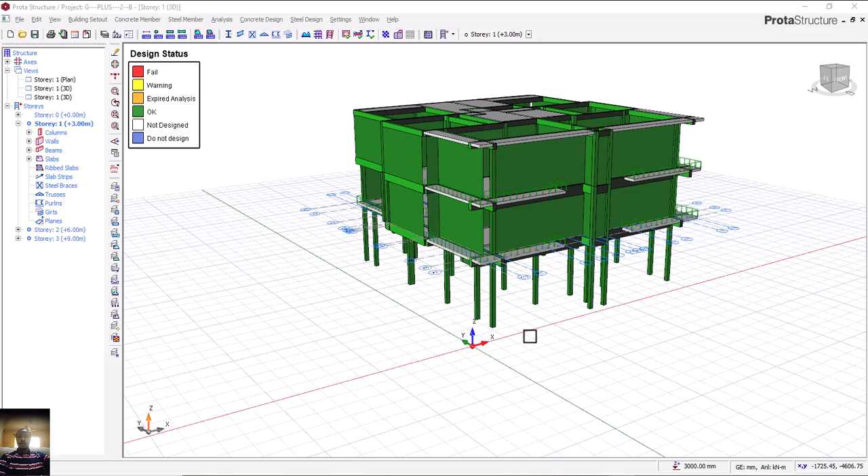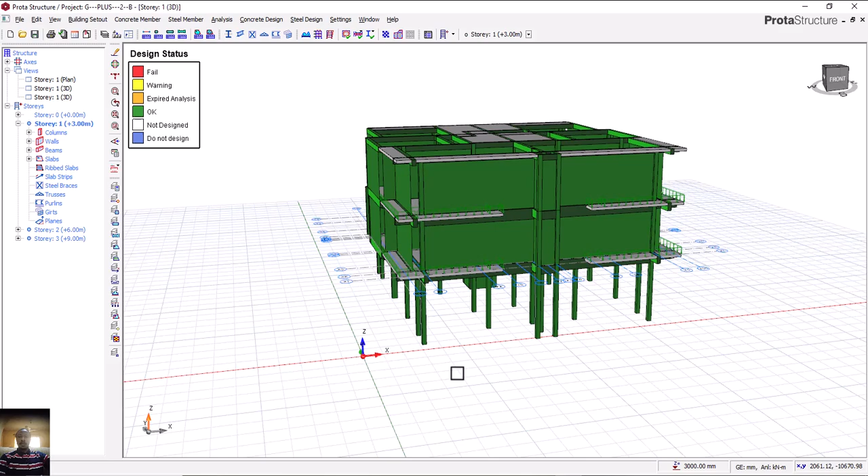Today there's something very important I'd like to show. If you look at this structure, the report says we have a bearing capacity of 150, with an average range of 125 to 175, so 150 is what we'll use. Also, the depth at which they got that 150 bearing capacity was 3,500 millimeters, that's 3.5 meters.

Let's look at our structure. Let me come to storey 0 on 3D. This is story 1. Let me come to story 0 by double clicking on it. Can you see this? From here to this place is our story 1. Now our foundation is from here down, which is not up to 3.5 meters. It's just about 1.1 meters.

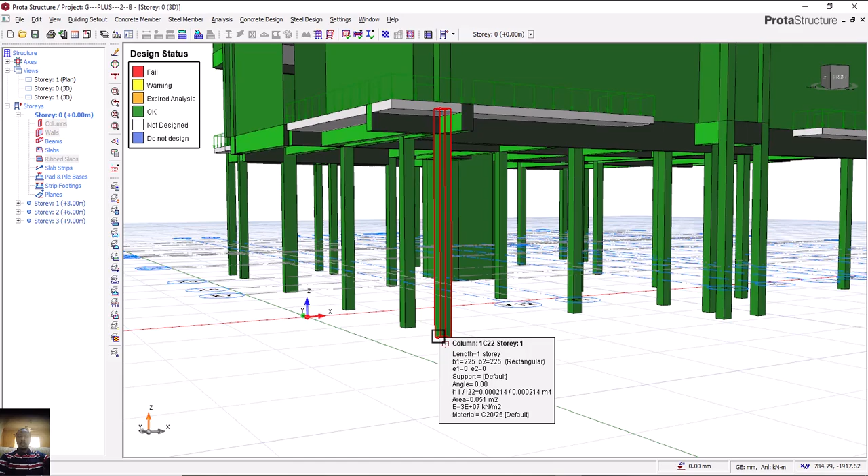Based on the soil report, we're meant to have 3.5 meters depth. So how do we effect that? Let's do that. For me to effect that depth on the column, we have to use a pad. So the way they're going to do this foundation is not the normal way of digging a trench.

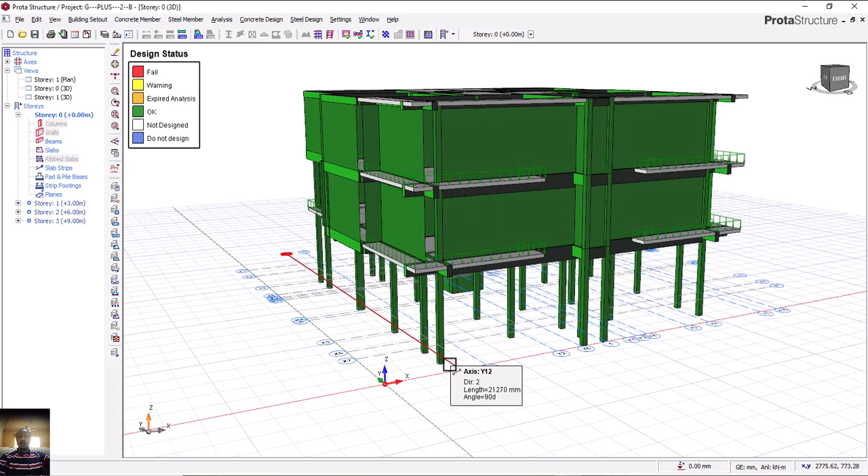They are going to pick points, and at those points they'll use a machine to dig to that depth, then cast, all through. Maybe when it's at some meters above, then we can think of having a trench.

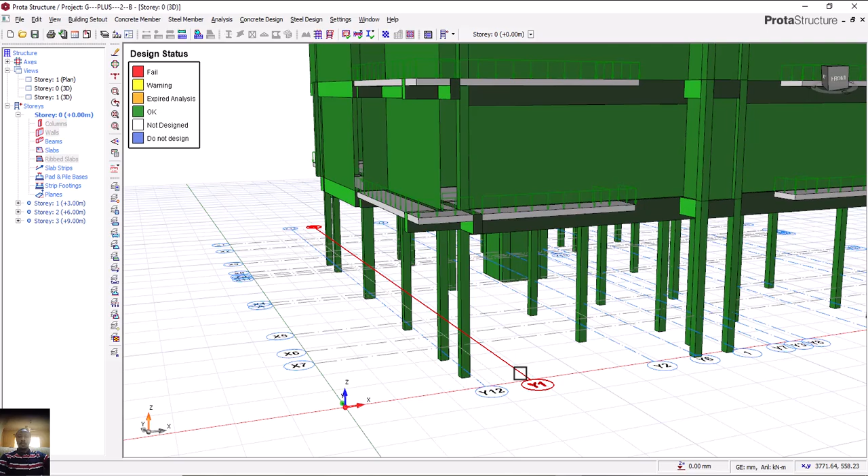I won't explain that now. Definitely at that depth we cannot just leave a whole column from here, already 3.5 down, and also come up 3 meters. Guys, that's 6 point something. So without breaking it, to avoid buckling, what are we going to do?

So in order to avoid that, let's first effect this depth. I'll come here, come to edit story. You can see the foundation depth here. I'll click on it and set it to 3,500, since it's in millimeters. I'll now click OK.

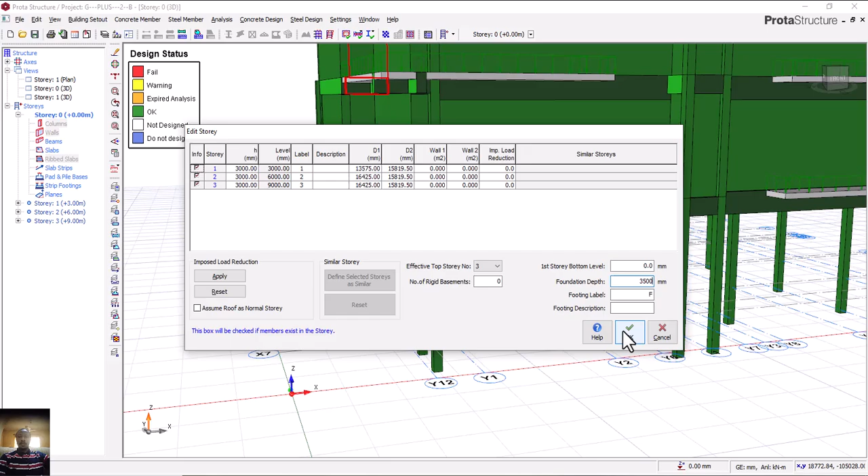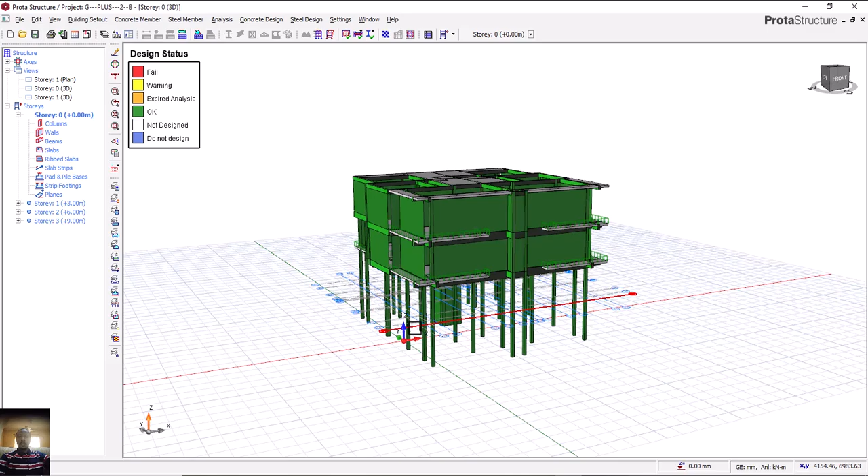Can you see now? You can see the effect, the difference. So if you like, for you to be sure it will pass the design, we can reanalyze. Looking at this, it's actually passed, it's very okay, it will carry the structure at this depth.

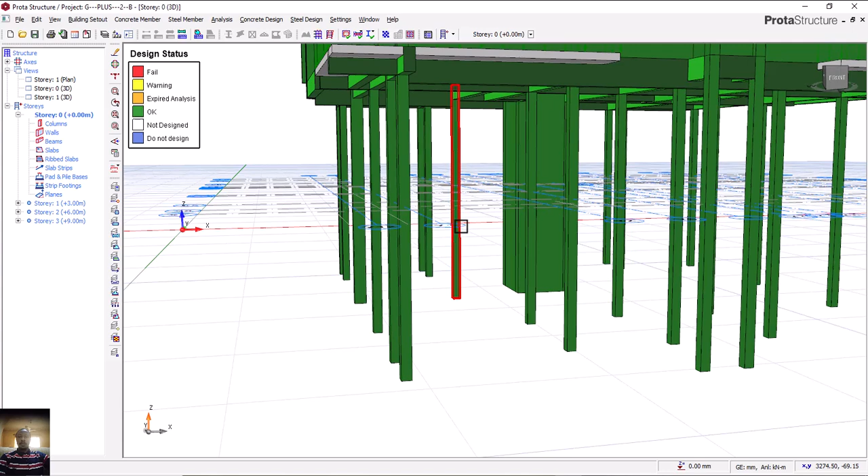But from experience, it's very important, we cannot just have it all straight like this. Since we cannot have it all straight, we are going to break it here and provide a beam, a foundation beam all through.

So let's go to story 1 plan. I'll come to plan view, then to story 0. I'm going to provide my beam. Bring up my beam, where's my beam, my story beam, sorry no, come to member, yes, concrete beam. Now from this point the property will come up.

So the beam I want to use, that's my plinth now. Let's call it plinth beam, 350, okay to carry it, since it's already in contact with the soil, which in one way or another is going to act as a support also. So I'm going to use 350 by 225 by 350.

Now what's very important, I'll come here. Can you see? This is my 3D. We have it in millimeters. I'll come here and make it go up to 3,500. Let's see it first, what we're going to get. Click on it, okay, then click here, escape, let's see the 3D.

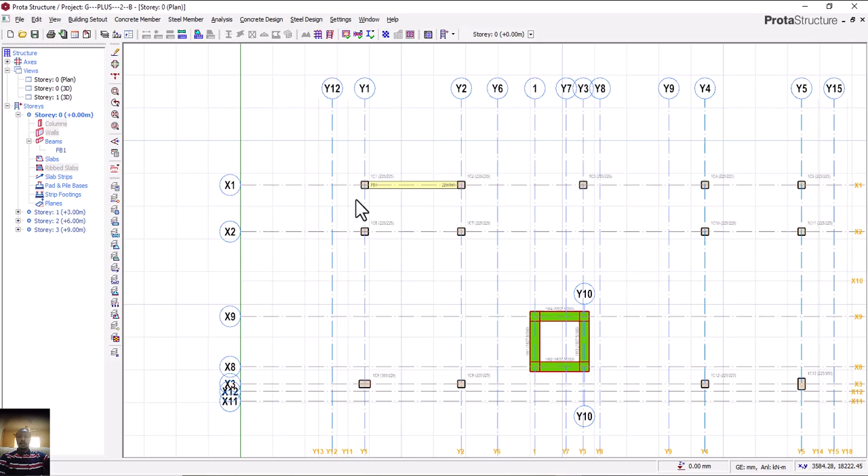Can you see what we have now? So if you look at it now, it's above the axis. Is that okay? At the upper side. So I want it to be on this axis. That's how I want it on this particular axis.

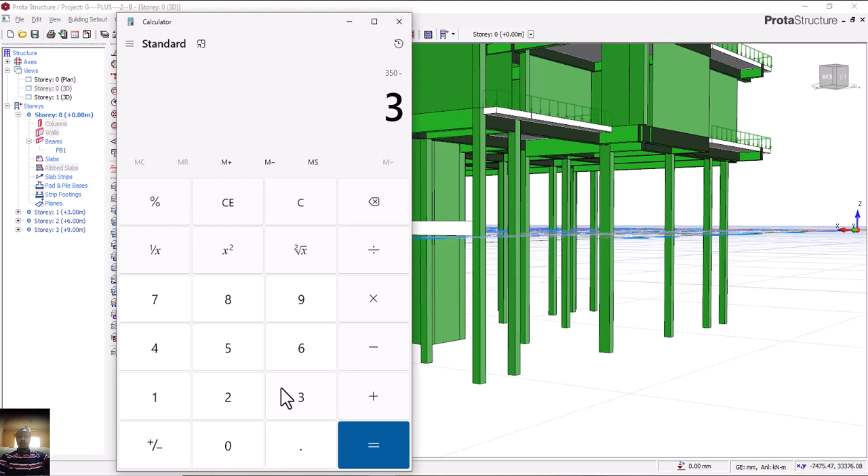Is that okay? So I'll now come here, property again, come to this 3D side and make it 3150. Is that okay? 3150, and then click on update. So can you see it now?

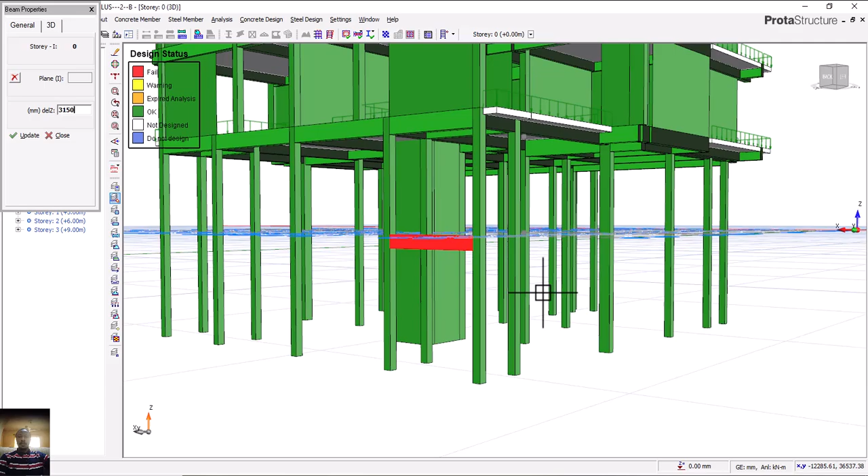Now escape, let me escape. So can you see what we have now? Can you see it now? So exactly where we want it to be. Can you see how we have done the calculation and how we have achieved this? So this one becomes my plinth beam now, which I'm going to be providing for all of them all through.

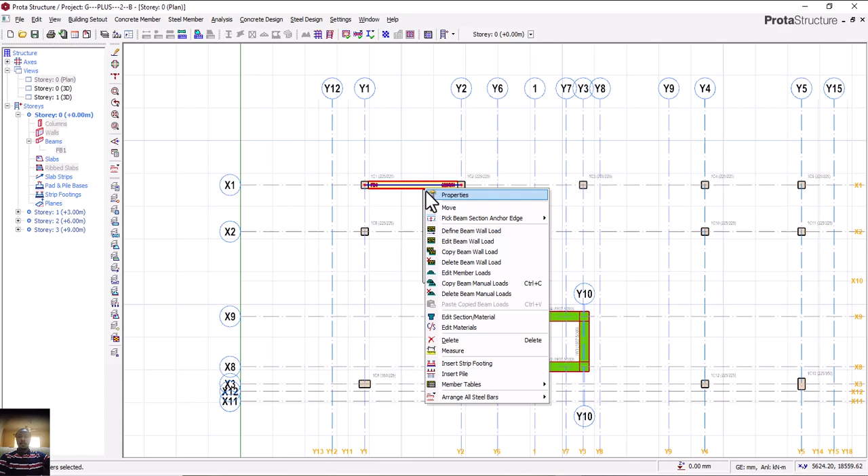Is that okay? I will now come here, come to this place. I will now take the properties of this, click on this, right click and click on the property. So I begin to insert it.

Is that okay? Based on what I have, let me just run it through. Let me also run this one. I think they're on the same straight line. Am I correct? Yes, they're on the same straight line.

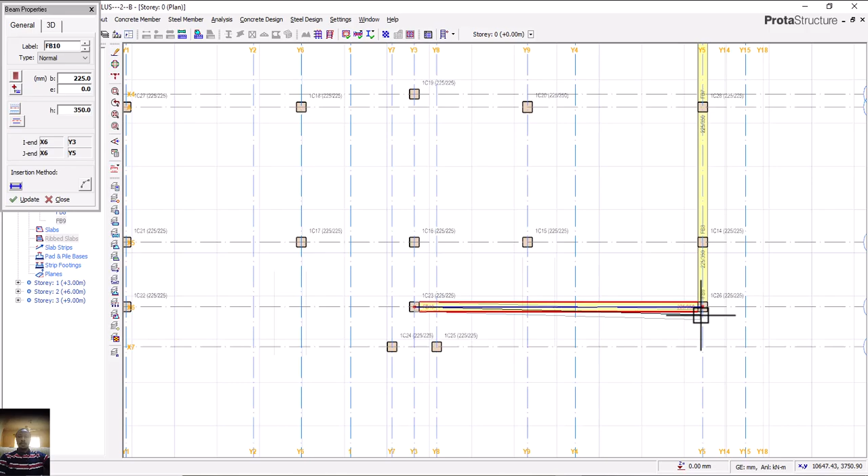Is that okay? Also, I think this one came like this, and also like this. This one also like this. Plinth beam, so it can be different from that of the superstructure. Is that okay? So it doesn't really mean.

So I can come here now, click on this one, and then come and join it with this. They are on the same straight line. Is that okay? And then also come here again.

This one came to this one here. Is that okay? And then this one also came to this, from here to this one here. Is that okay? Okay, all right, it's correct.

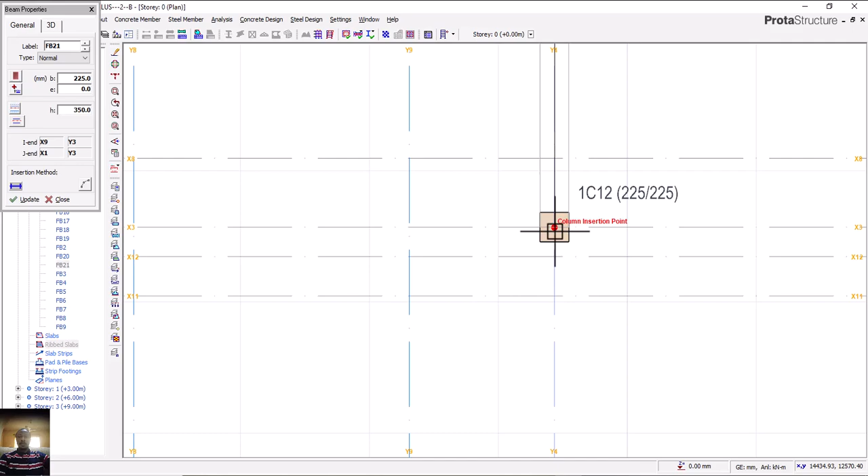And then also here again, is it all true? Yes, to this point here, to this point here. And also I can come here and say this one from this point here, from this point here to this point here. Is that okay?

And also I can come here now, this one comes straight from this point here to this one, all straight to this point here. Okay, then I can also come here now again. I can have this one here.

Okay, I think this one is not part of it. This one is not part of it, because this one is at the top. Is that okay? It's at the top. We have this beam. Is that okay? This is how it is. Is that okay? Around here there's nothing here. Is that okay? We can leave it like this.

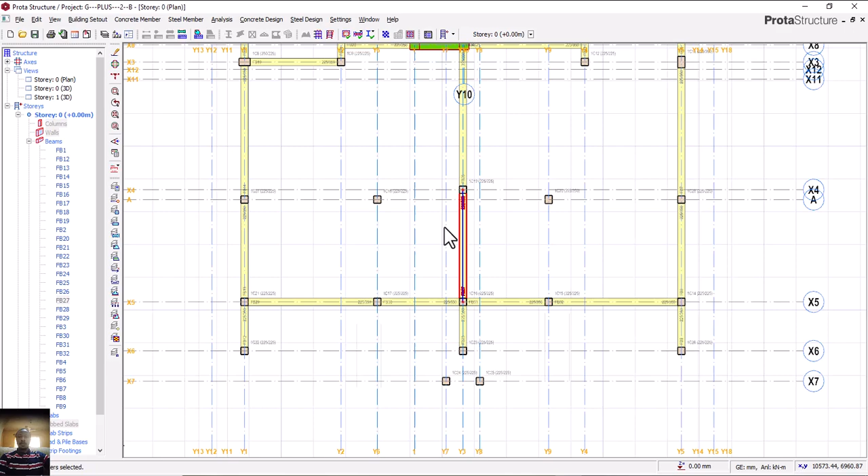Okay, so I'll come here now, continue again the property. Is that okay? I'll come here now, click on this to this one, and also come and rest on this. Is that okay? Also proceed again to this one, and also proceed again to this one. Can you see it now?

So I'll come here now, this one now comes straight to this one here. Is that okay? We can have it like this. Let's see first. I'll come here now, this one connects to this one. Is that okay? Okay, we can have it like this, one is also okay.

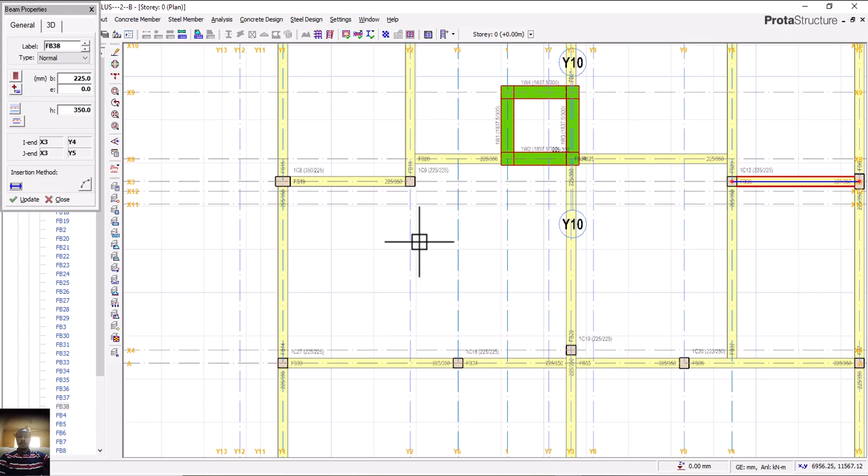Then what happened to this place now? Can we have this one here? Yes, we can decide to have this one like this to this place. Is that okay?

Is that okay? So that is that. What else? I think that is all. We can leave it like this as it is. Let's check our 3D first.

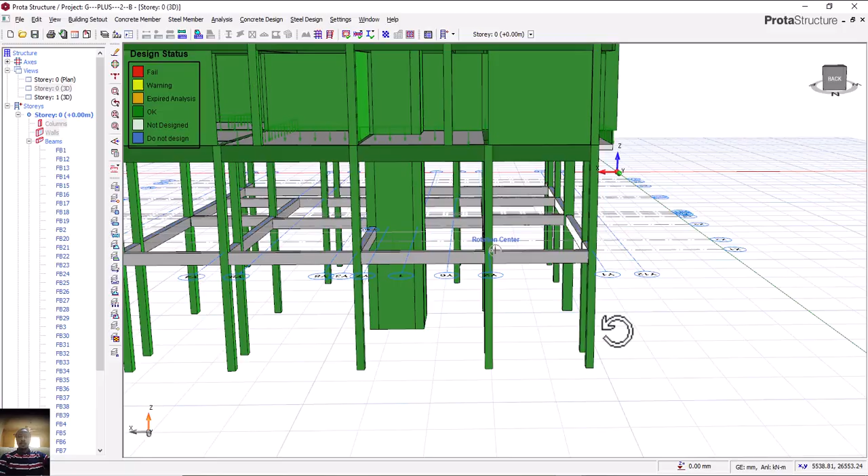Come to 3D. Can you see what we have now? This becomes our plinth beams. Can you see it now? With the help of this one, it's holding this particular column.

If there's anything called buckling, this one wants to shift. This particular beam will hold it, and this one also holds them in both directions. So that is that. It's having a function as a support.

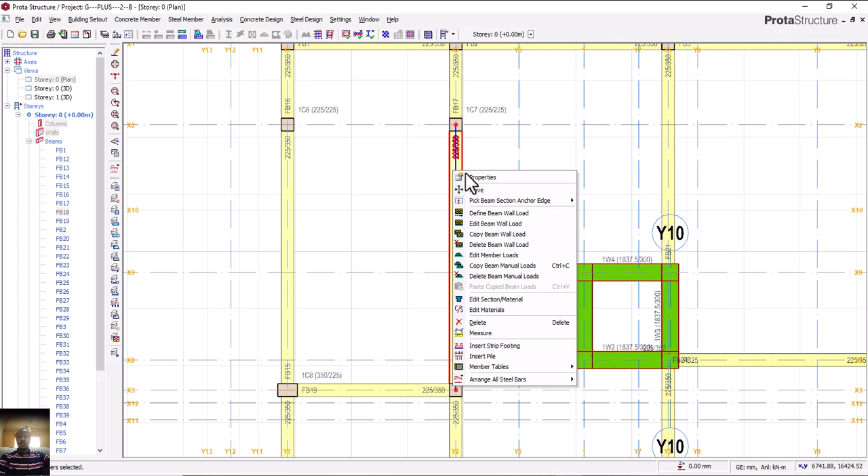So let's go back again. Let me provide something here. Let me provide this property. Let me provide this one also. Yes, it's holding it. And also this one also.

As a structural engineer, you have to understand the behavior of this. Let me have it here.

Why am I putting this? In case you want to buckle like this, this one will hold it. But what about if you want to buckle like this? What happens? Which one is going to hold it? That's why I'm providing this one. So you have to be able to think and reason very well, properly, as a structural engineer.

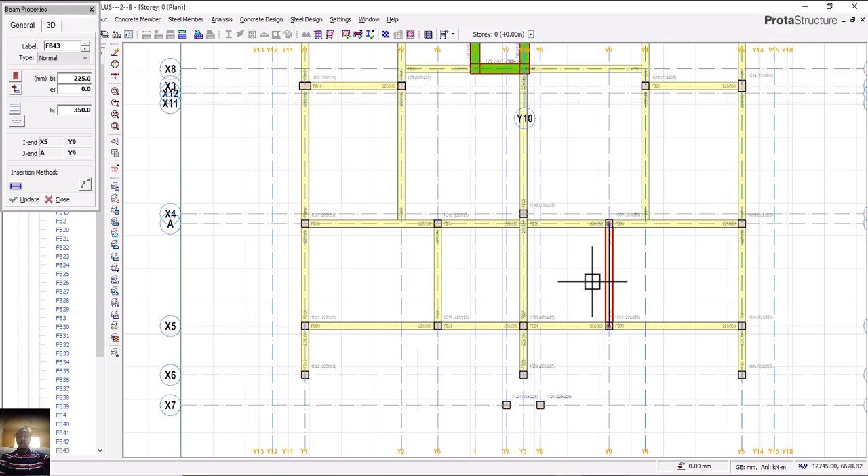Is that okay? All right, so that is that. And okay, we have not finished. For the sake of this one also, we have to, because we still have some here.

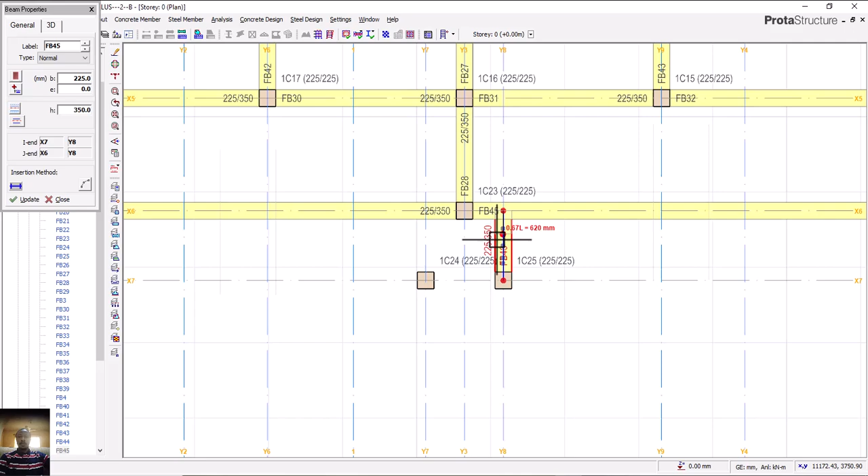We have to bring up this one here. We have to bring up this one here. It has to be connected to this, and come here and to this, and also this one to this.

Perfect. Can you see what we have now? So perfectly modeled. Can you see now? So now I'll come here. Sorry, where is it? Come here. So you can now see what we have.

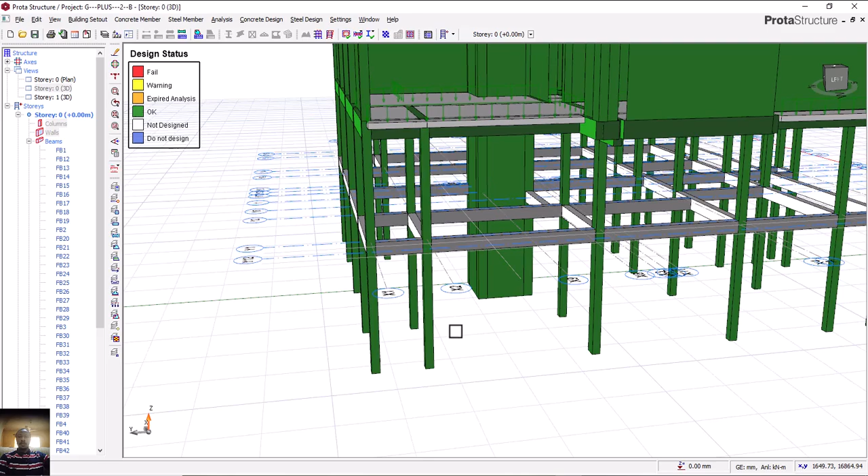In terms of loading, it might not really necessarily need a loading for all of this, because the purpose of this one is to help us to bridge.

To hold these particular columns together. And even initially, when we raise our blocks and all of that with our ground floor, definitely it's going to carry. So with the help of this beam also, it has added to the strength.

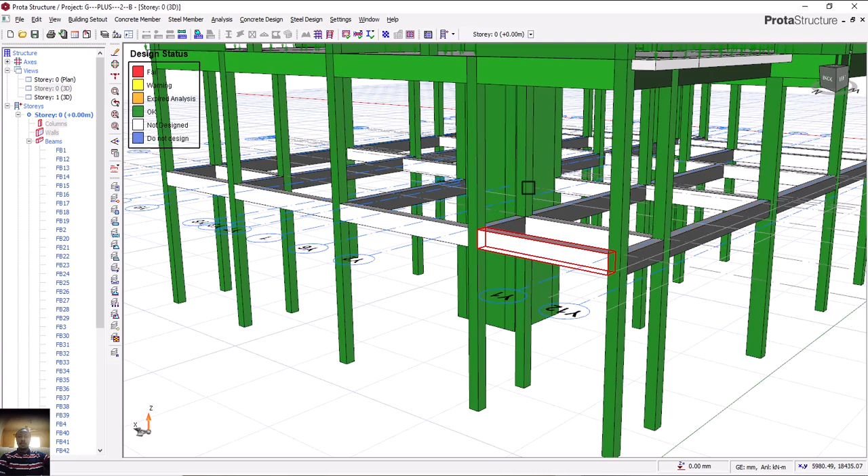And if there's any uneven settlement around here, this particular one bridges that settlement, which will make it not affect the superstructure, isn't it? And at the same time, it's also helping to hold these columns together because of the height.

Because of the height, we cannot be having slender columns. If it's going to be a slender column, it's going to need to be robust, isn't it, to be able to withstand buckling? So that is that. You can now see what we have achieved now.

Having explained this one out like this, now that we've done it this way, the next thing I'm going to do is analyze this beam. For me to analyze this beam, I'll go to my design. Where's my design? Come to my design and come to this, and come to the foundation beam.

Is that okay? So you can see that they are not designed. So I'll come here now, click on these settings and parameters. Then I'll come to this particular place. Where's my parameters? Yes, come to this place.

From this parameter now, maximum foundation, this one, we need minimum and maximum. I'm using this one, 16-16. And also, where's my cover? For this foundation beam, I'm using 200 maximum, that's spacing, and then my links the same, 10-10.

Is that okay? I've not finished, there's something I'm looking for. Let me come to design, under design, yes, which is here. Can you see cover now? You can see concrete cover. So I'm using 50-50. You can use 35-50-35, but I want to use 50-50.

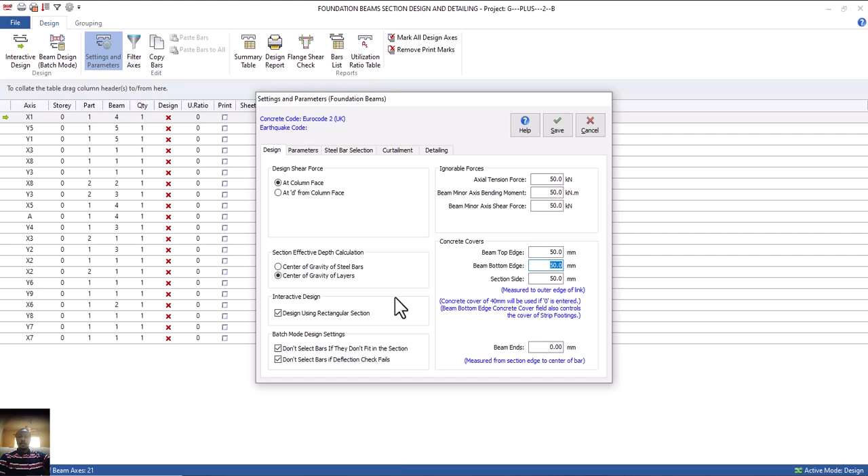Because it's in contact with the soil, 50-50. And having done all of this one like this, those are the settings we need to do here. This one done, minimum and maximum, and this one minimum and maximum, and also this one we have reduced it to 200 maximum.

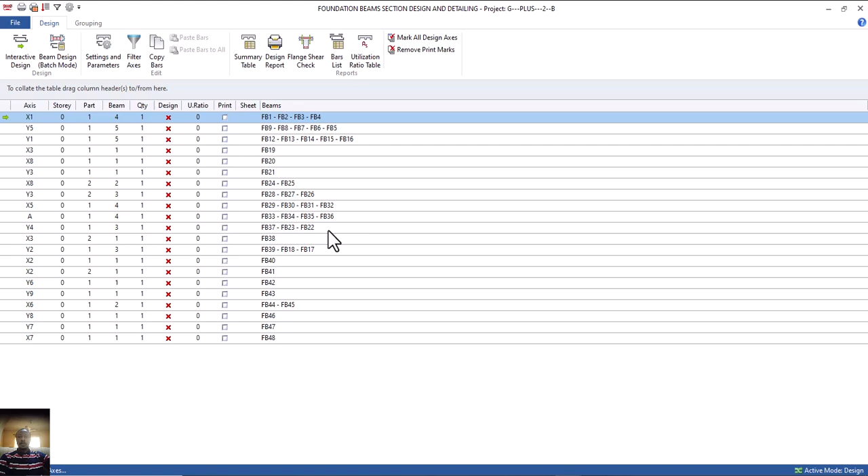So everything's okay now. I'll come back here, click on save, I'll say yes of course. So after saving it, let's wait for it. Correct, I'll now go ahead and design it, click on reselect all, and then click on calculate. Okay, so let's wait for it to calculate.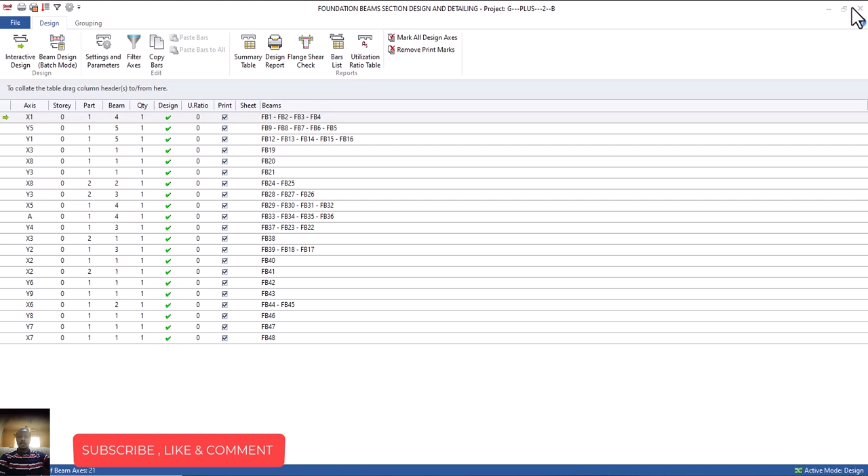Definitely it's going to pass the design. So you can now see what we have now. Click on OK. Without that setting, this particular beam will not design. I'll come here and click on close. So you can now see what I have now.

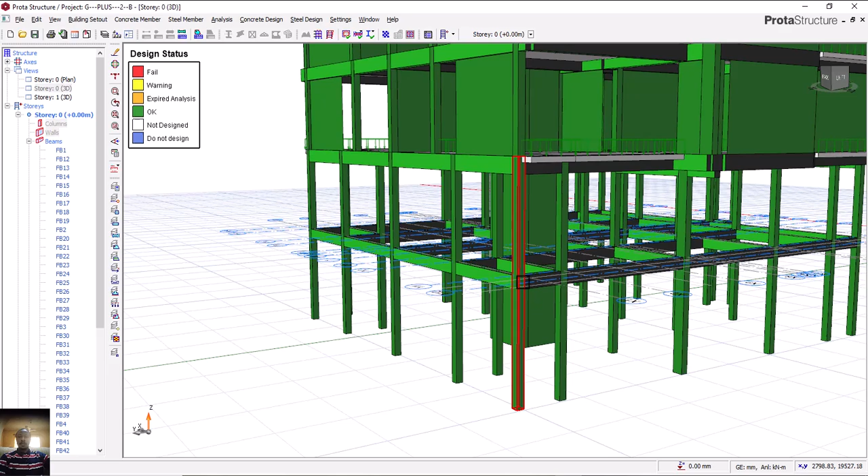This is how you go about it, because it's very important. The structural engineer might not, the soil engineer might not tell you that this is what you need to do here. But you being the structural engineer, it's very important to know what you are doing. I can't just leave it like this and begin to provide my pad footing.

So you can now see what we have fully achieved. So the next thing now is to do our foundation. Now for us to do the foundation, don't forget this version of ProtaStructure is version 2018, so I might not really need to go to my settings to enter my bearing capacity, because in the course of doing my pad footing, it will give me a place where I can enter my soil bearing capacity.

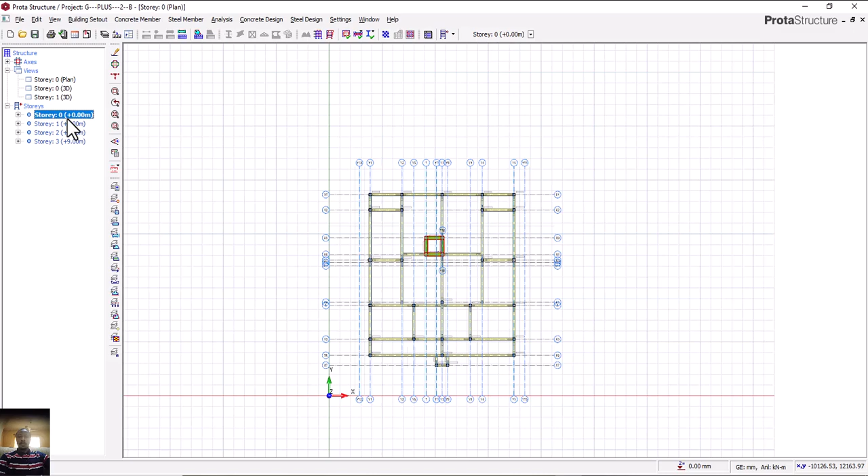So I'll now navigate towards story 0. I'll go towards story 0. Double click on story 0. We are here. So I'll come here, right click, and click on insert pad footing. Let's wait for it.

Can you see it now? It has popped up the place for me to enter all the information needed: footing depth. I'm using 300. And what's my allowable stress of soil? It's 150. My cover is this, you can see I've done the settings.

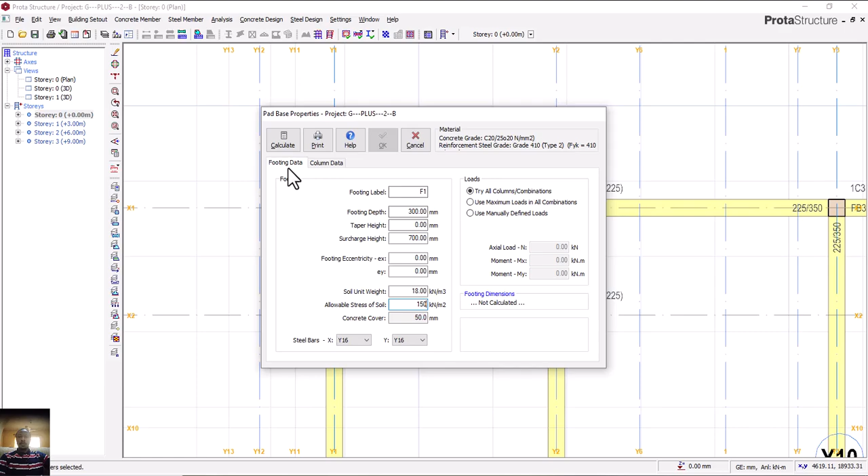Once I've done that, I will click on calculate. Let's wait for it. Can you see, perfectly calculated. You can see this place is okay, everything here is okay, and then you can see the spacing.

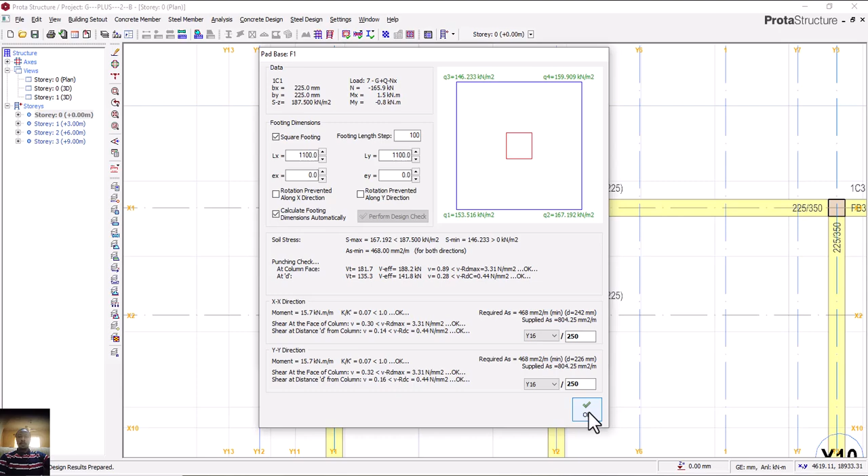Then I'll click on square footing. Make sure you always click on square footing, and then click on OK. Everything's okay, I'll click on OK. So can you see what I have now here?

So I'll come here and click on it again and do the same thing: insert pad footing. All the information are already intact here, I'll just click on calculate. Can you see everything here is okay? I'll click on square footing. Can you see, 1000 by 1000, and everything here is okay. I'll click on OK, then OK.

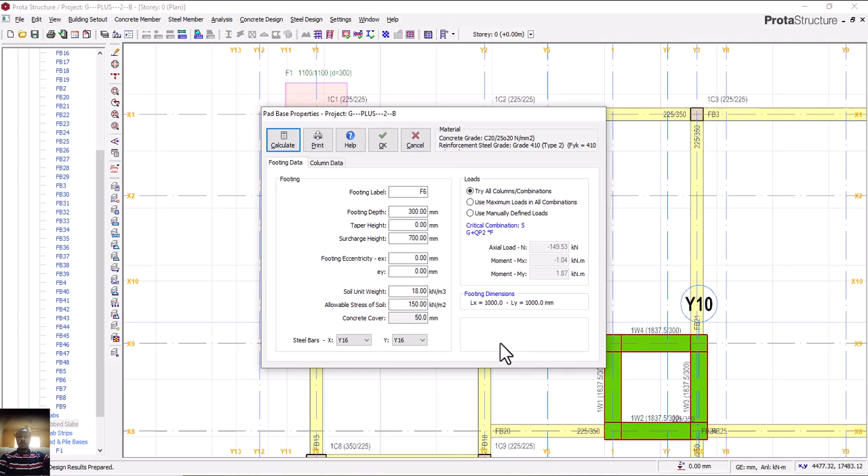So this is what I'm going to be doing to all of them. Let's see how it goes. So I'll pause this video, then I'll now continue.

There's something I need to show you. So let me come up again, let me click on this. Let's do this one together. There's something I want to show you. Insert pad footing, I'll click on calculate.

Can you see now, that this place where you're okay, but still in red, and this one is showing us fail? So which means it's not okay. And once we're having something like this, you can see it's about punching.

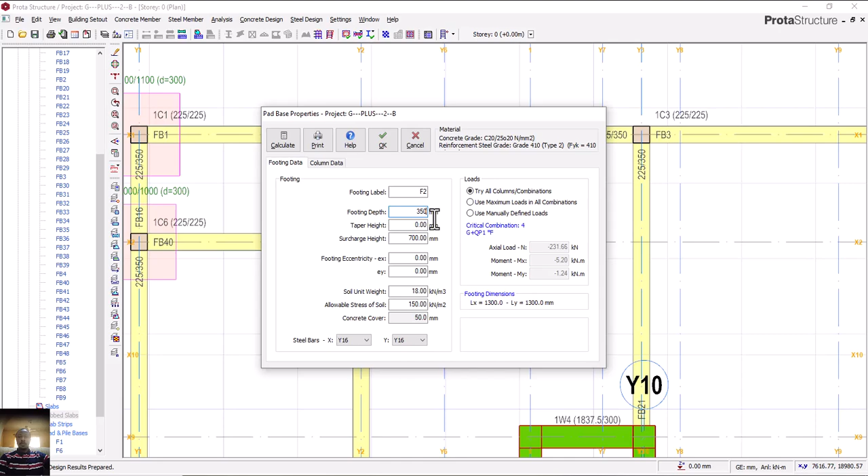Once it's about punching, you just click on OK and come to this place. Instead of 300, I would make it 350. Let's try 350 and see. I'll click on calculate. Can you see, 350 is okay, it's now okay. Thickness of my pad is now 350.

It's very okay, I will now click on this, and also click on OK. I'll now click on OK. Is that clear? All right, so this is where we are now. Can you see, I've done it.

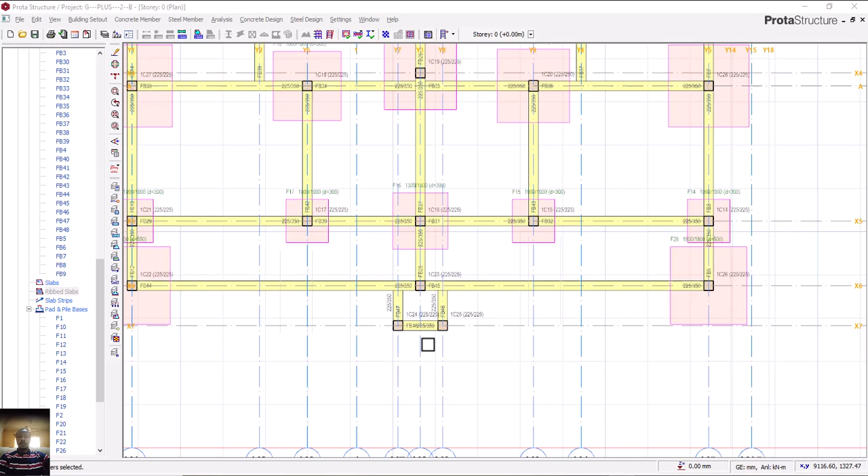So let's now see how we can do combined footing. If you look at it, these ones are very close, even though it's 1 meter, definitely they will be overlapping, isn't it? So since they will be overlapping, let's just use a combined footing. Let's do this one together. Let me take it to 300, then calculate.

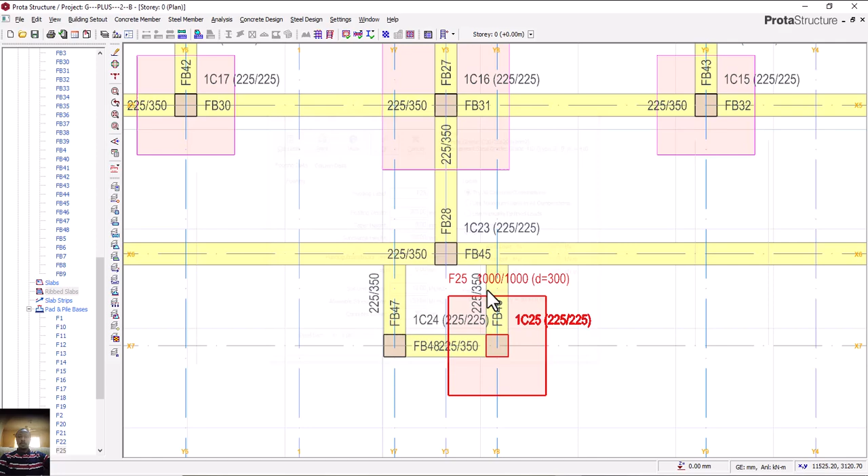So you can see this is what I have. I then click on OK, then click on OK. So can you see now? By the time I come to this place also, let's also try this one and let's calculate. Okay, everything seems to be okay. Oh sorry, I did not click on square. I'll click on OK, okay. All right, so it's fine here.

So let's now see this one, let's see if it will be fine here. Can you see already 1000 plus, and here can you see now the difference? So if I should click on OK now, let me just set it first. Let me make it 450 and then let's calculate.

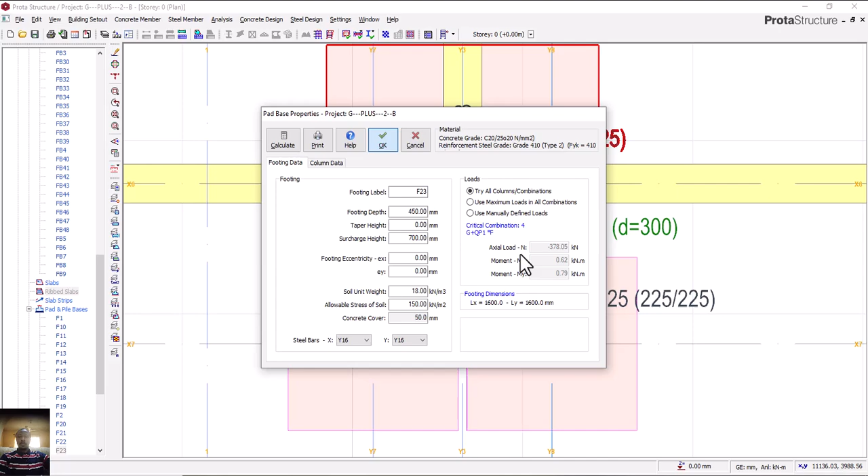Okay, it's okay. But if I come here now, can you see 1600? Let me click on OK and OK. So let's see what we are having. Can you see now? Can you see how they are? This one is overlapping here, isn't it? So automatically it will not work.

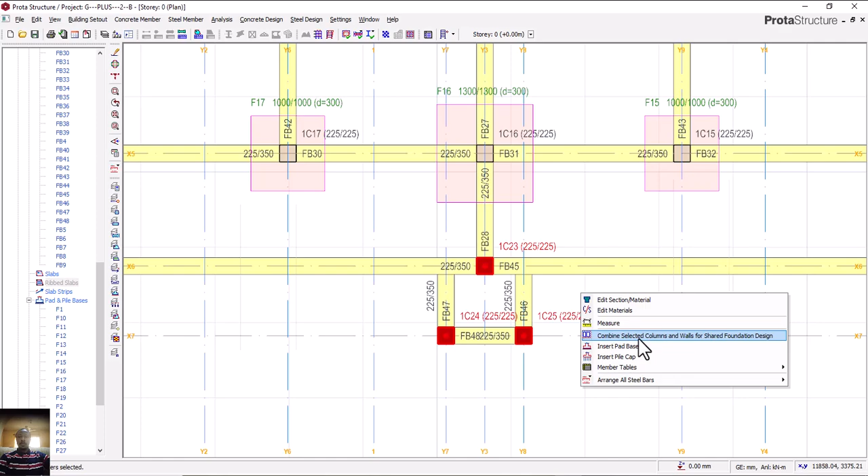So I'll delete it and also delete this one, then also delete this one. Then I'll click on this one, press my Control key to select these columns, then right click and click on Combine selected column. I'll click yes. Then I'll right click again and click on Insert pad base. So I'll now come here now.

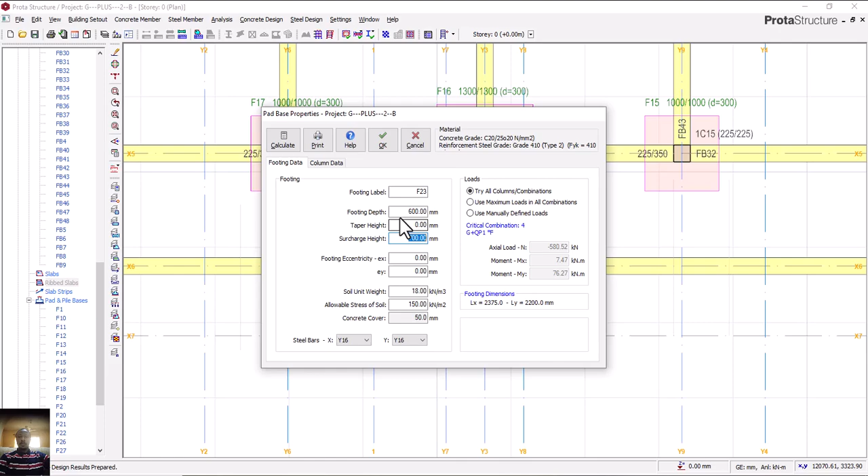So let me look at this, calculate. Can you see it's failing on punching? I'll come here now, let me just use a 550, let me click and see. Still the same thing. So let me make it 600, and then come here and click on calculate. Can you see? That's now passed.

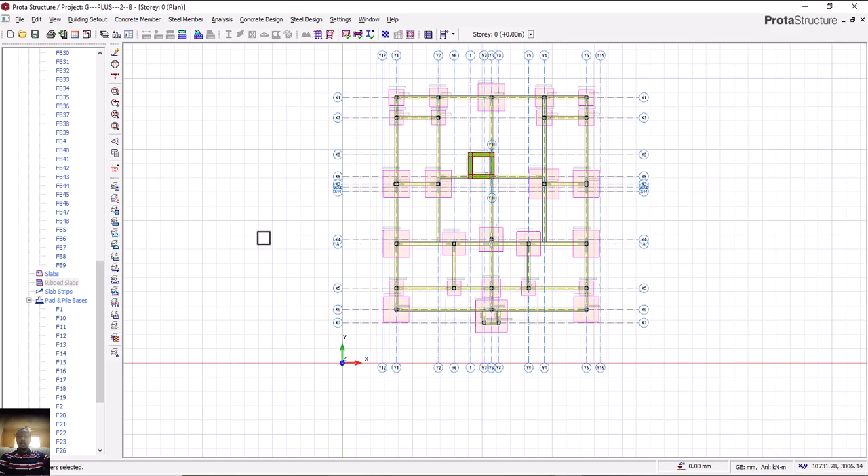Can you see now? So if I should now check our 3D now, let's now go and check our 3D. Can you see what we have now? Can you see? Work perfectly, what?

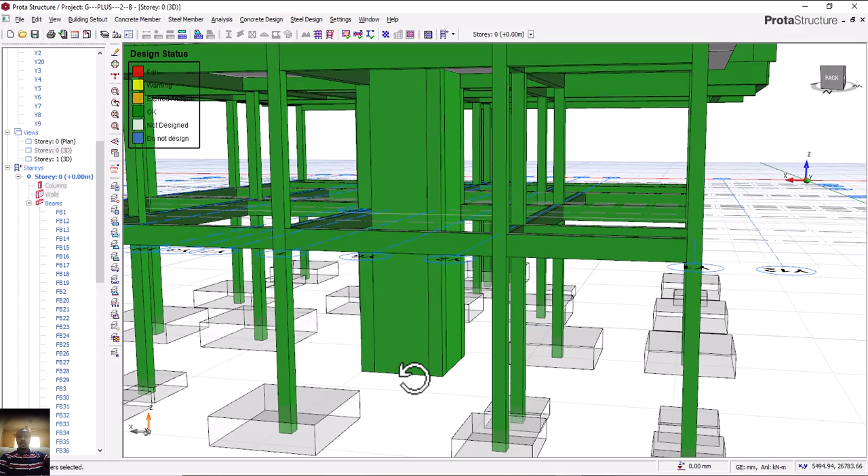Done. So the only thing that is left now is this place of store. This place is not a lift, just a store, based on architectural drawing. This place is meant to be store. Store for this one on the ground floor here is going to be a store for them inside, and on the next floor store inside, and on the last floor store inside. So that is it. That is that. All right.

So you can now see how we have done that. So in this case now, definitely if you use combined footing in this place, it will not work. Let's go there. If you look at it now, let's come here now, click on this one, select this one, then.

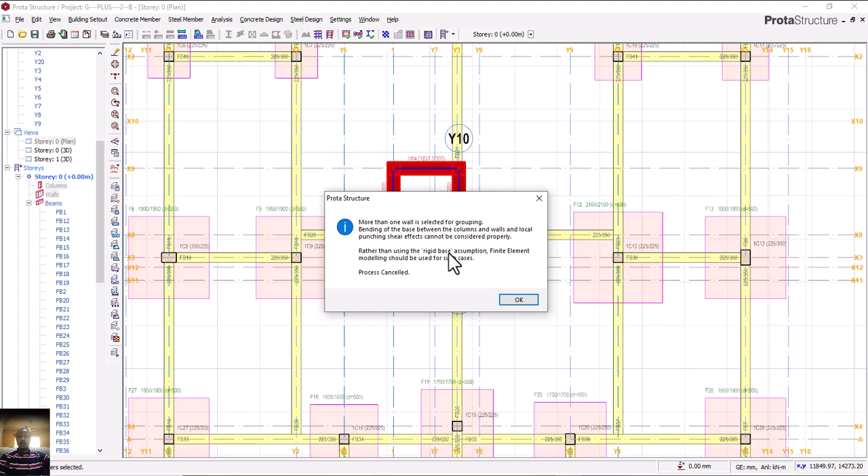Individually, it can't be individual, so I have to click on this one, select this one, select this, and right click and click on Insert Combine. I'll say yes. Okay, it might not really want to work, it might not want to work. Okay, more than one this wall is selected for bending of this. Okay, rather than using this base finite element, press cancel. Okay, so all right, it's okay.

So yeah, if you have to do it using a combined pad footing, it will not work. I'll click on create a typical footing. I'll say yes. All right, so let's see, let's just see what we have. Can you see? It's failing woefully at this one. Let me increase this one. Can you see now? It has passed based on this, isn't it? If you look at this 1001 by 1000, I can't be using square.

I want to use a square footing. Actually, I will not use a square footing for it. Let me click on this. Let me reduce this one to 300. Let me click on this. Okay, it's based on this.

I will now increase this one. Okay, let's go back, let's go back, so you can see what we are having. Let me use 400. Let's say 400, calculate. Okay, it's okay at 400.

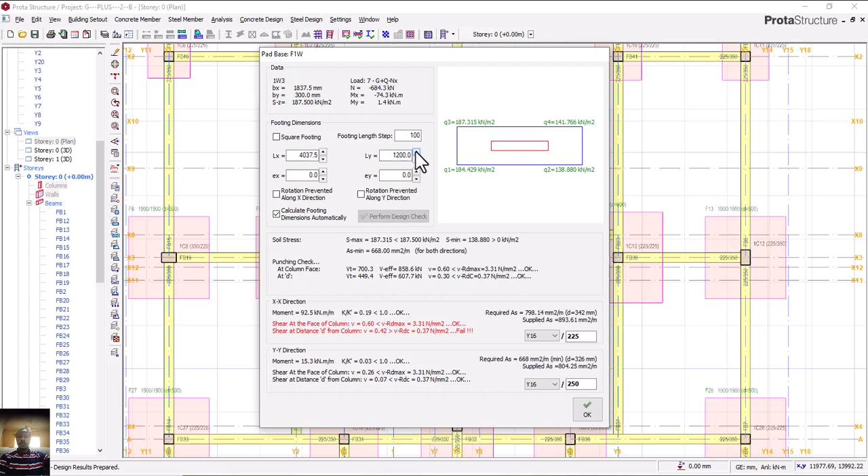150 by this, is that okay? Let me reduce this one. Will it work? Okay, it won't. Can you see now? It has. Let me take it back. Okay, 1.3, can you see it now? At 1.3, so I'll click on this and then click on OK.

So can you see what we have now? If you look at what we are having now, is that okay? If you look at it, it's also okay, because they are crossing each other. You can see that means we are going to do it in form of what we call a Y strip. This one now looks like a Y strip footing.

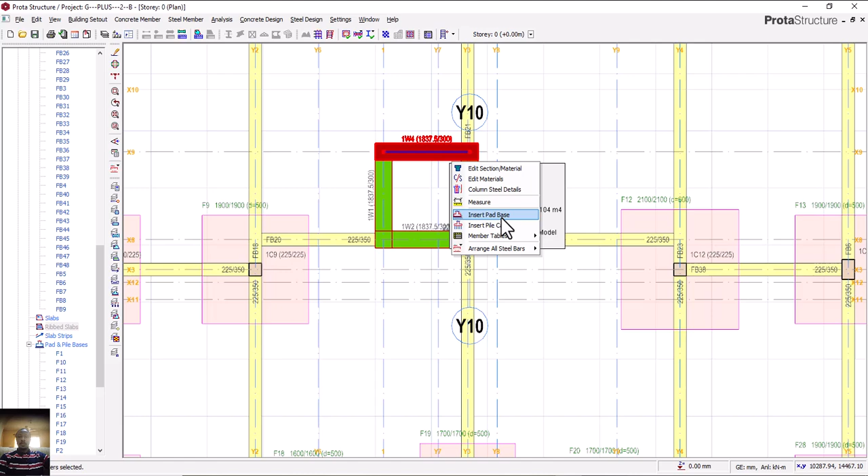So let me see something. Is that okay? We have seen it, isn't it? Right click and come here and click on insert. Can you see? We don't have a Y strip here. You don't have a Y strip footing here, it's pad, is that okay?

Let me click on redo or undo. Okay, can you see what we are having here now? Can you see what we are having? Which means that if you have to go by this, like this is going to be from here to this point here, and this one goes like this and goes like this. If this one is okay, good and fine.

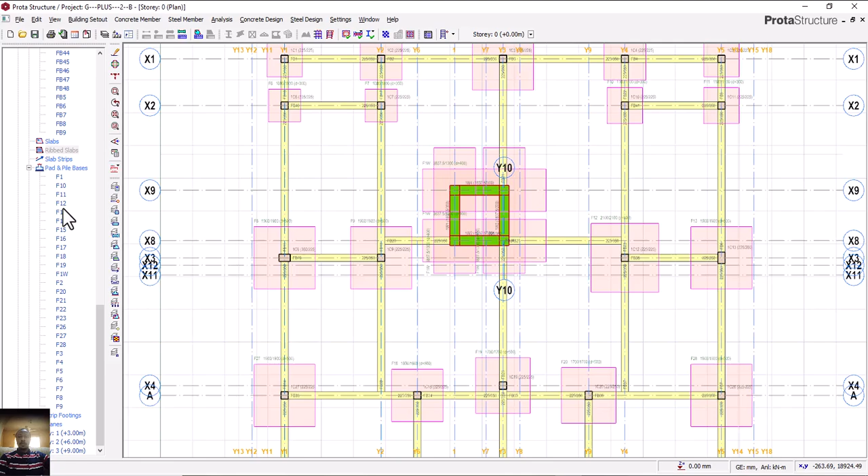If not, we have to use what? Beam raft, is that okay? We are going to use beam raft to carry this particular wall. So let's see the 3D view of what we have.

Can you see it here? Can you see? You can see what we have here. And if you look at it invariably, are you hearing me? Invariably, the entire place. I'm coming. Let's go back, let's go back. Invariably, in your own detailing, since we are having this up to this, like this and like this, you can

now make it in form of what? A combined pad footing, is that okay, of this wall, of this total length. Can you see it now? Which will still pass the design. That means from here like this, go straight like this, like this, like this, like this.

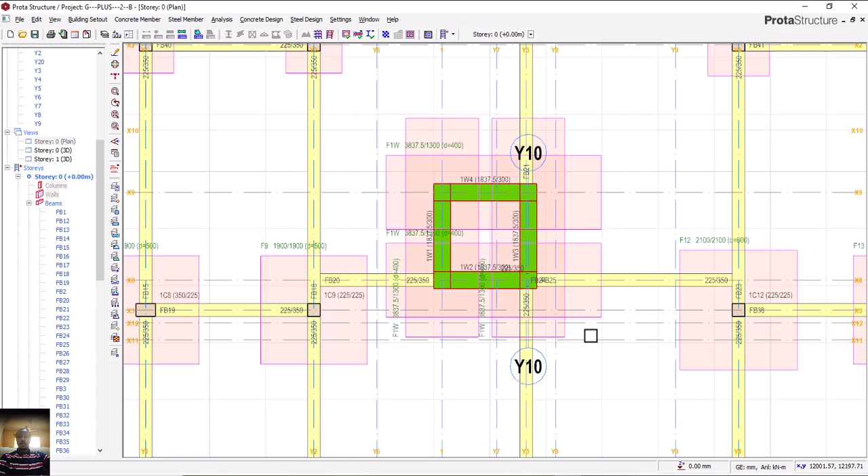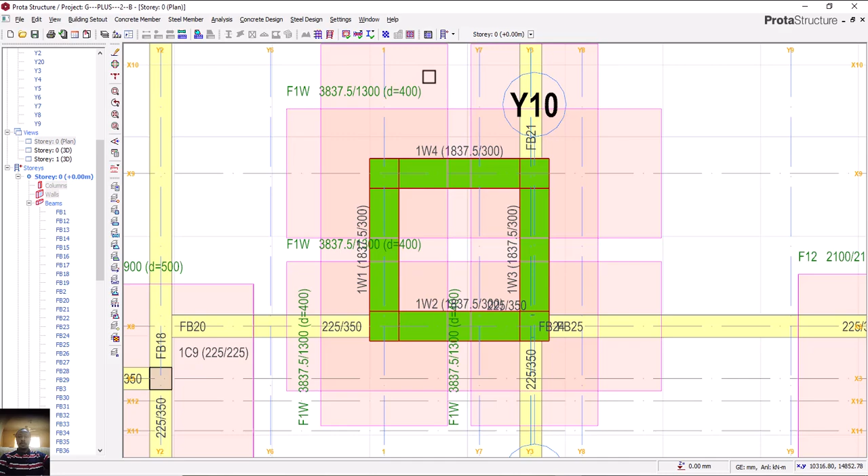Becomes your pad footing for this at this depth of what? 400, can you see, or 400. Instead of using 400, yes, 400 would that be what? 400, which is very okay. Or you use pad, sorry, Y beam raft for this particular place.

So this is how you go about it. So that judgment depends on you, but whichever one you are good to go. So this is how you go about it. Can you see what we have now? You can now see, can you see it now? You can see what we have.

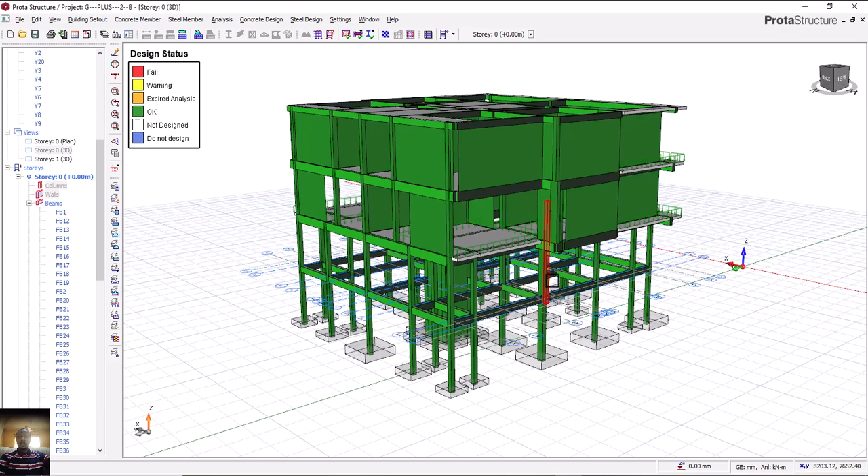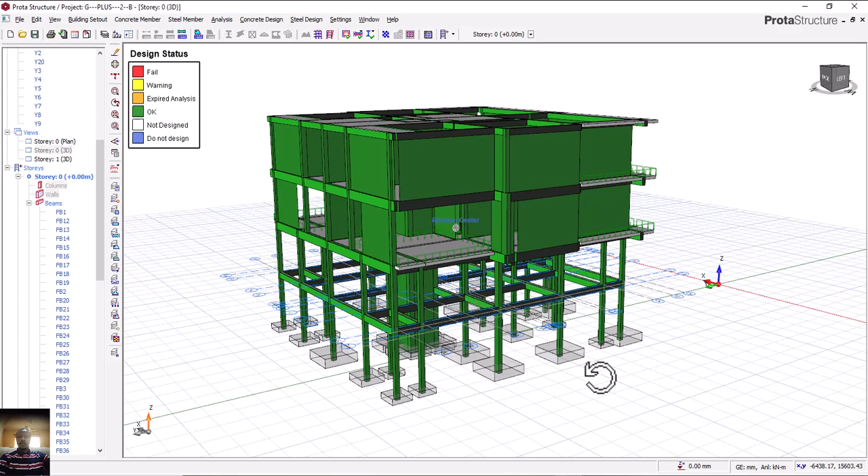So at this point now, based on this structure, as far as this structure is concerned, we are done with this, is that okay? We are done with this particular structure. So watch out for the next structure that will be coming up on a hotel building, is that okay? About a G+3 or 4, and it's very, very long, is that okay? It's about almost 40 something meters, is that okay? So watch out for that, is that okay? All right.